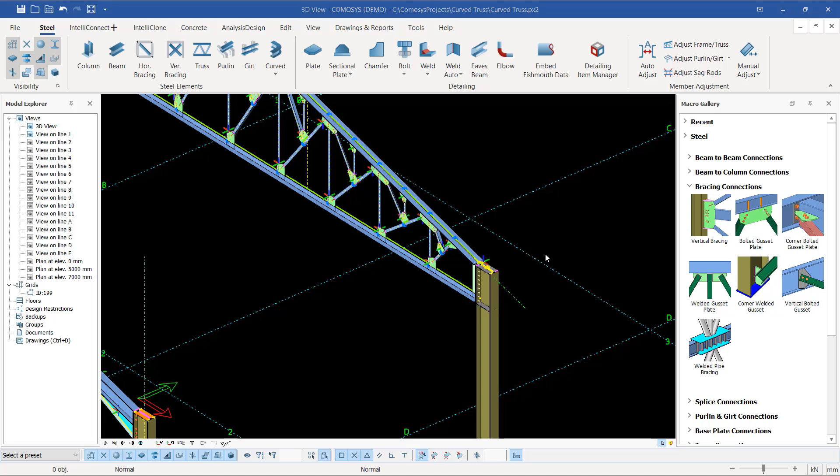We've decided to give it a portal frame. Now we want to create tie beams and vertical bracings here. Now we first of all start with tie beams.

Now under tie beams, I'll come to beams here and zoom close to a point where I'll be able to see a red snap on the screen, and move to the other end also and place and snap on that spot. Right click and terminate that command.

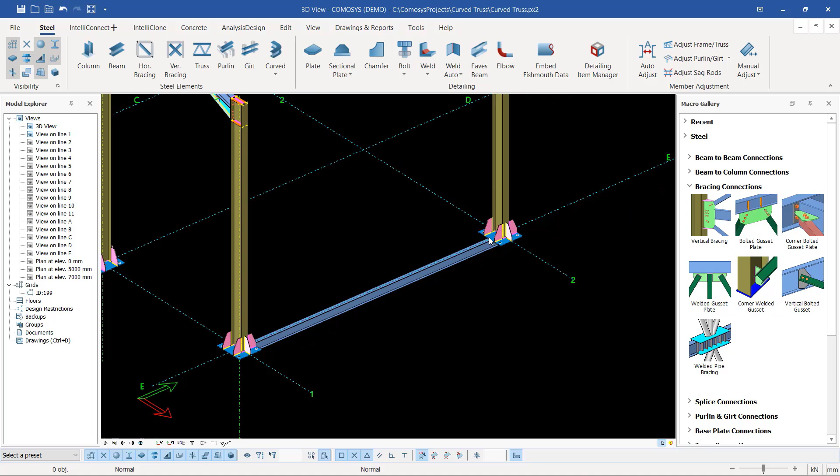Now we want to copy this beam up. Let me double click on that beam so you see the properties. This is IPE 180. If you want to change it, just click on that button and you'll be taken to a huge catalog of all steel profiles. Now let me just click OK to get out of that command.

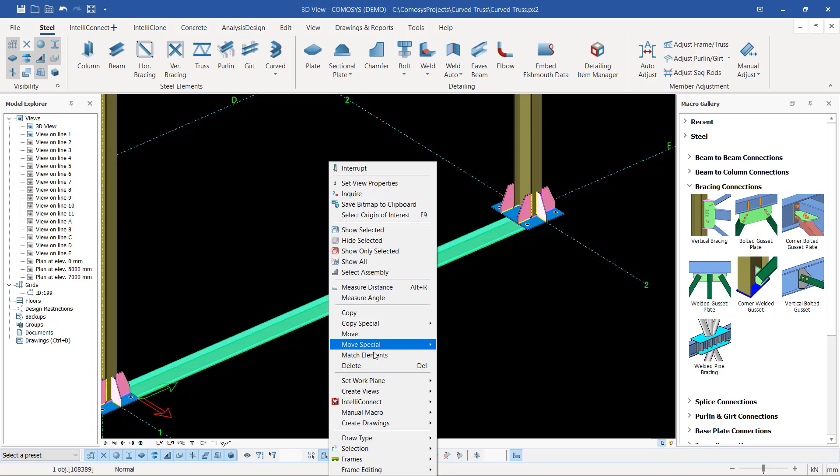I'll right click and come to Move Special here, and feed in 4800 and click move. Once I've clicked move, it will move to this position, or to this far end here. Now here I can create an end plate connection. First, prior to that, let me place the bracings here, place the vertical bracings.

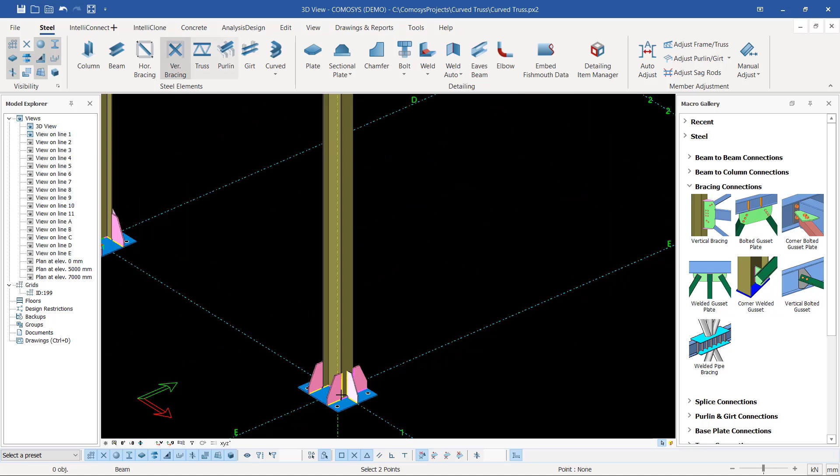Now I'll come to vertical bracings and zoom at the bottom end here until I see the red snap right at the bottom end, and snap right at the midpoint of this particular beam. Let me move up and down until I see an accurate snap right there. So I'll snap once again on the same spot and move to the bottom end of this particular beam column. Right click and terminate that command.

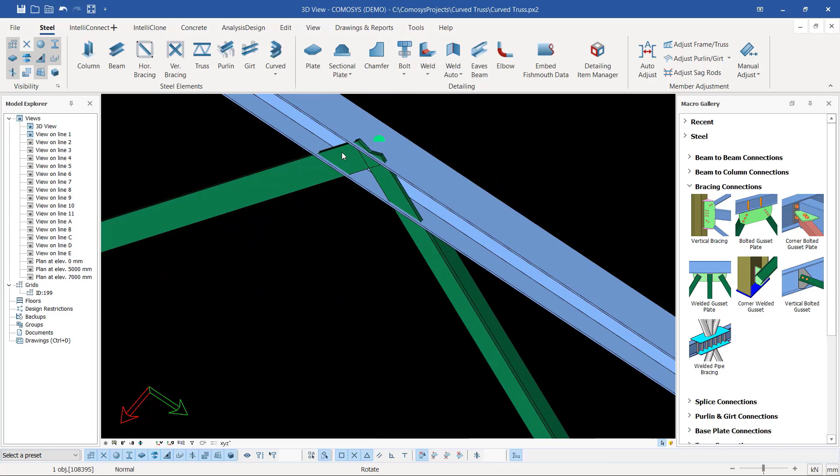If you take a closer look here, you can see we have two L-shaped or angled profiles. So we need a back-to-back profile, or twin angled profile.

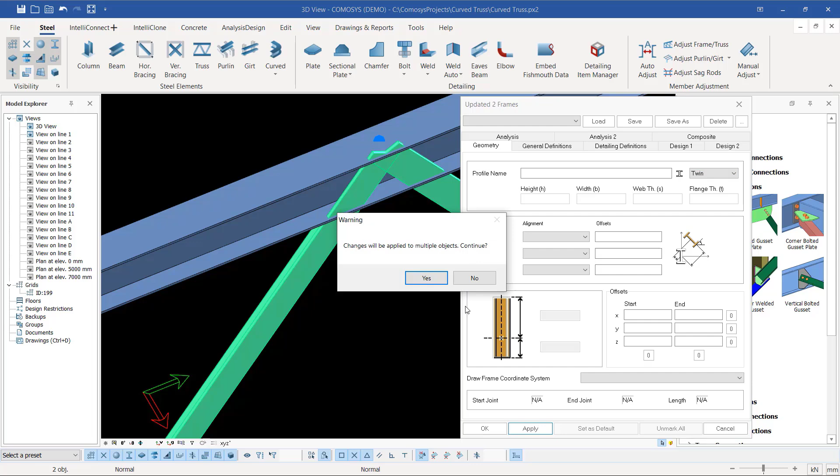So I'll select this member, then press Ctrl and double click on that member. Then I'll come here and select one to include in that selection. Then I'll change that to twin. If I click that, I'll be able to change everything in one go.

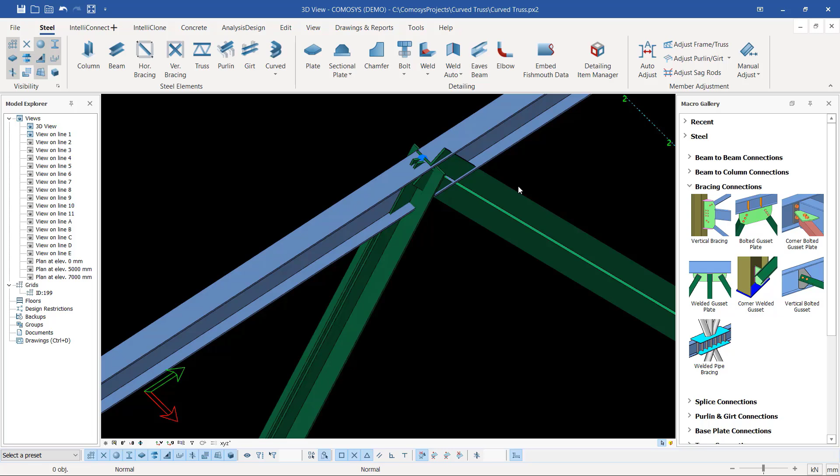So the arrangement or orientation of these members is not the best for me, so I have to change the orientation. I'll select that member, press Ctrl+Q, and turn it like that. Then press Ctrl+Q again, and turn the orientation of these two back-to-back angled profiles. So we have that in place.

So the next thing is we want to create a simple connection at the bottom end here. I'll come to bolted gusset plate — this is the best tool you can apply. Remember, this tool can be applied in so many connections, not strictly to beam and vertical connection. You can also apply it to a column. So let's apply it to the column here.

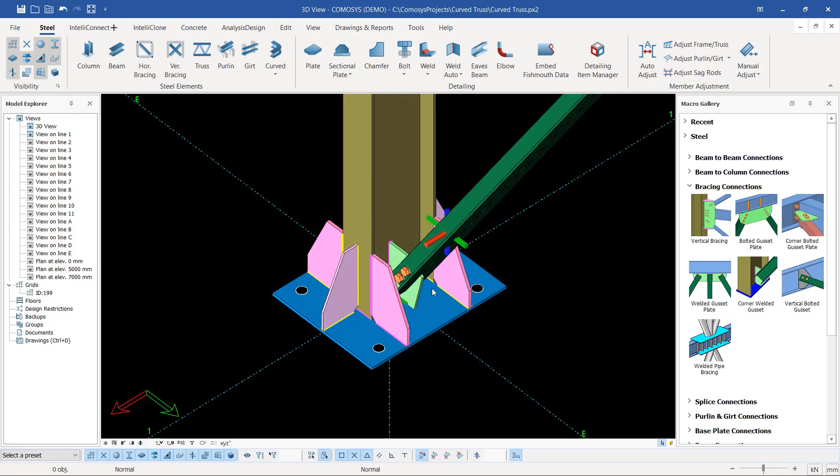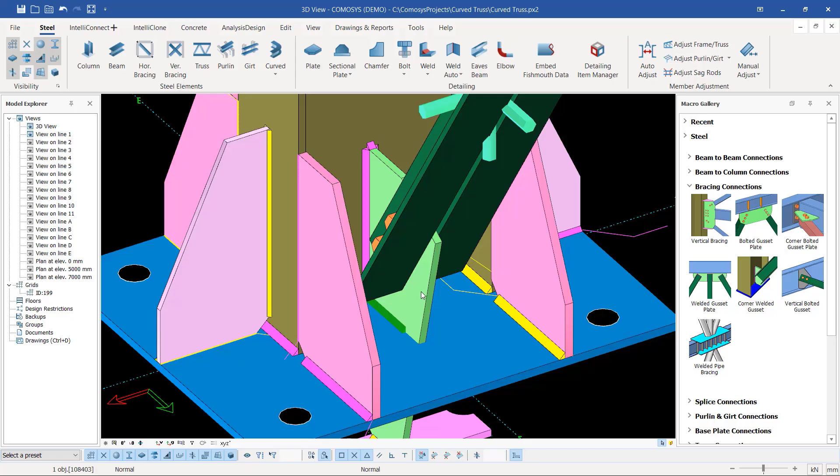Then I'll right click, and you can see a connection has been created, but it slightly needs some modification, because the gusset plate is moving right at the bottom of our base plate. That's not right. I'll select that gusset plate once again and press letter M and enter on my keyboard, and try to modify it so that it fits our requirements. Let me give it some time to bring up the setting dialog box here.

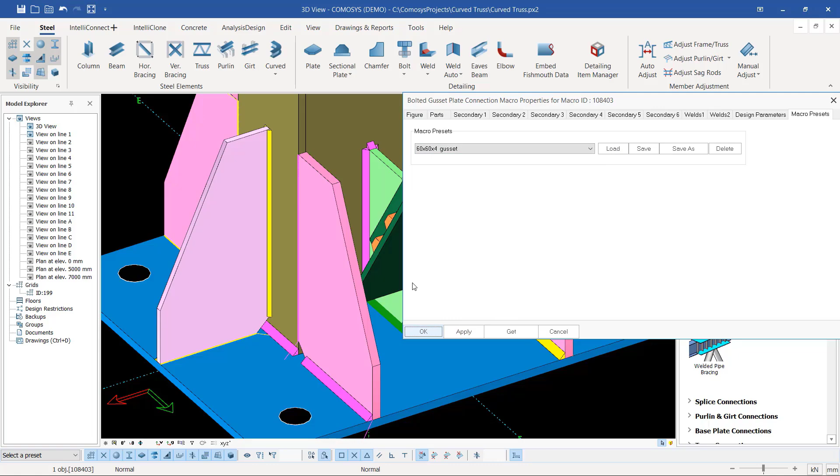Now I'll come to presets here. If I come to presets, I'll pick the brace — this is the type of connection I've customized for how I can apply it between the vertical bracings and column. So I'll select that and click load, then click apply. Once I've done so, you'll see that the clash or collision has gone.

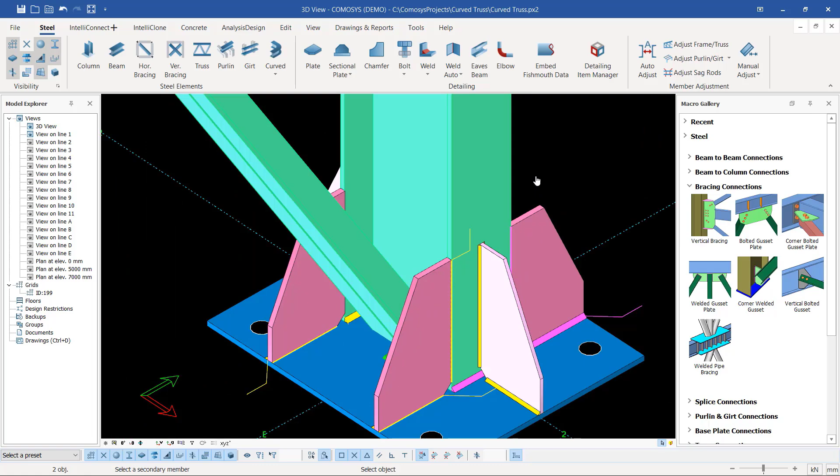So I'll apply the same thing at this far end. Instead of doing the same thing again, let me do it once more so you can see how it works. I'll come back here and select this column and that column, right click to create a connection right there. So if it needs more connection — yes, of course it needs.

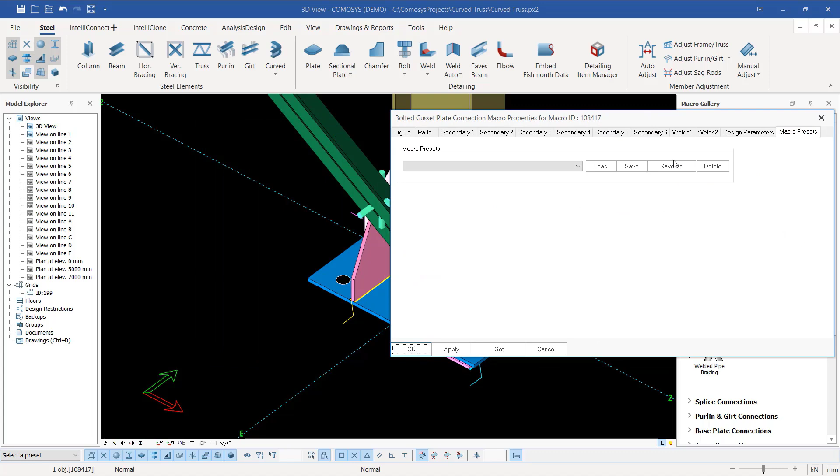Press letter M and enter on your keyboard, and that will bring the setting dialog box for this particular macro. So I'll come to my preset here and pick the right one and load. The moment I load it here and apply, I'll be able to get some modification that fits what I need.

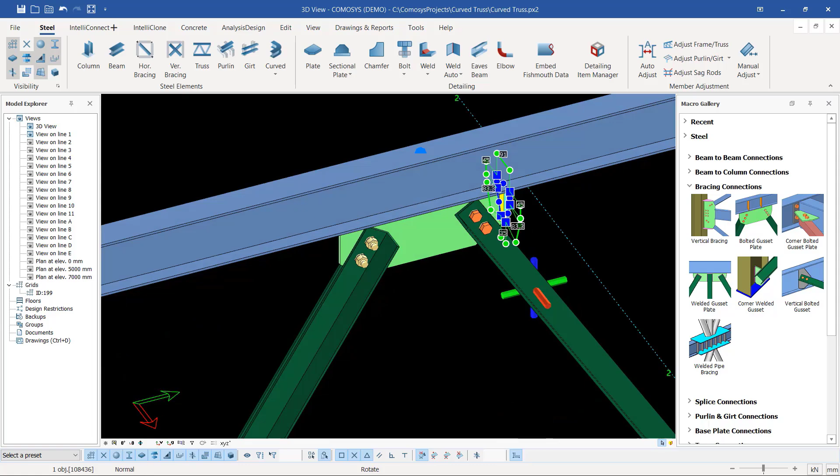So I'll use the same tool, select on that column or beam and select on this and that, then right click to create a connection right there. You can see some plates or gusset plates already on this side, and I don't want that. I select on that, press letter M and enter.

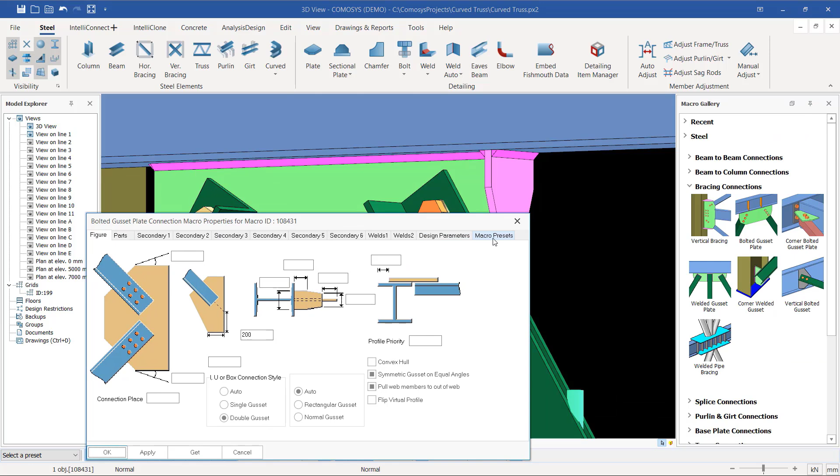Then I'll give it some time to bring the setting dialog box. If it doesn't appear, we just press letter M once again and it will come back. Let me come here and use and apply this. So let me just use brace 1, load that and apply. So I have that in place. That's how I've done that.

Now let's create some end plate connection here. This end plate connection is beam to column. So we'll come to beam to column connection, and I want to create this. Remember to create a connection where the bolt on this side will not interfere with the bolting on the other side. So different end plates will be much better option.

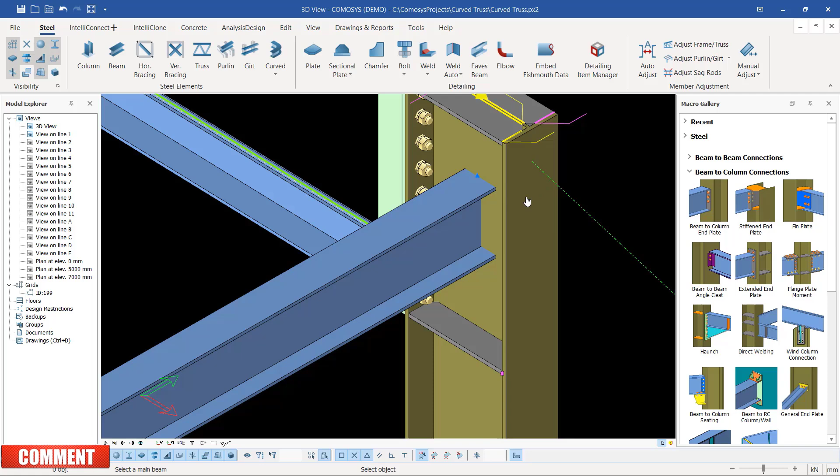If I select on that, select on the column and select on that, then right click, and we've done that. If I click on that and turn that around, I'll be able to see there's no collision, no interference with the bolting on this side that will hinder the erection on site.

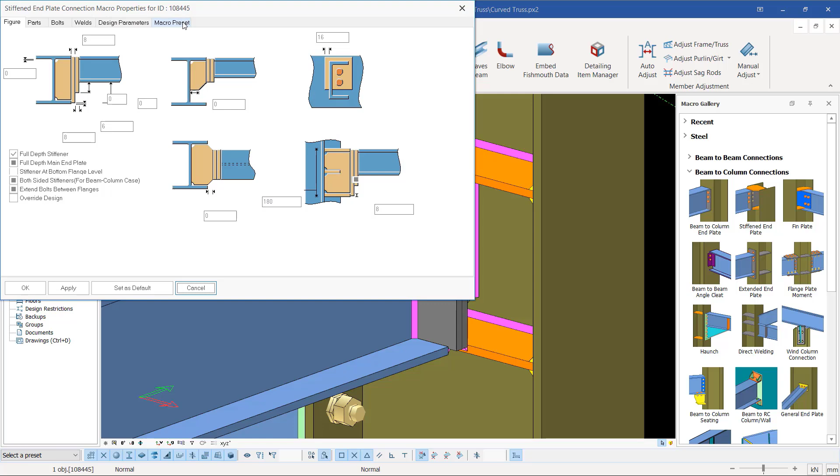Though I need to add some bolts here. So I'll select on this member, then press letter M and enter on my keyboard, then try to add more bolts there. Let me check if I have some presets here. I don't have some presets there. I'll come to figure here. Under figure here, I want to add some bolts.

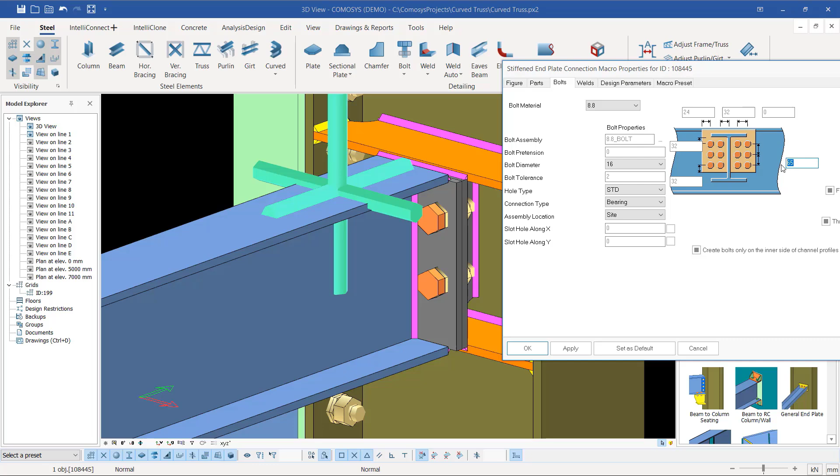So to add bolts here, I'll come there and try to modify this. How many do we need? We need probably quite a number. So if I come here, this is 32 and I need maybe 3. Let me try add that. Let me just give it 65 and enter that... 75. That's enough, we don't need to add more bolts. This is just for demonstration on how to apply this.

So if I come here and select on this member here and press letter M and enter on my keyboard, I want to save this type of connection.

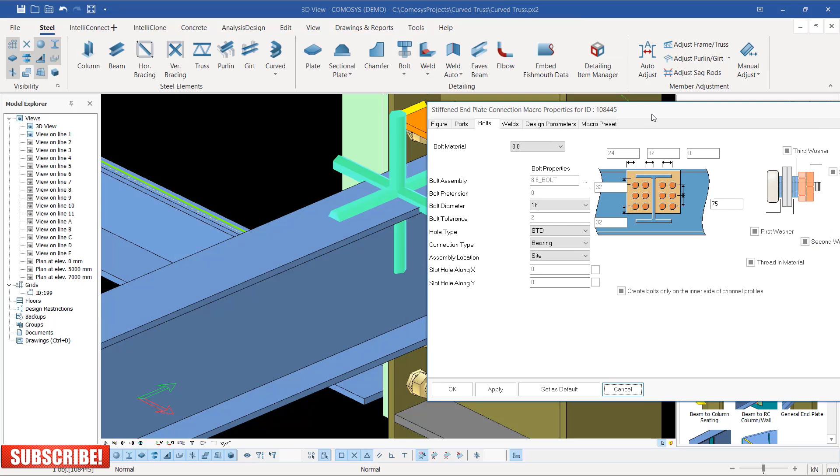So I'll come to preset here and click save as, and I want to type beam, just beam column connection. Column connection. That's it. Beam column connection 1.

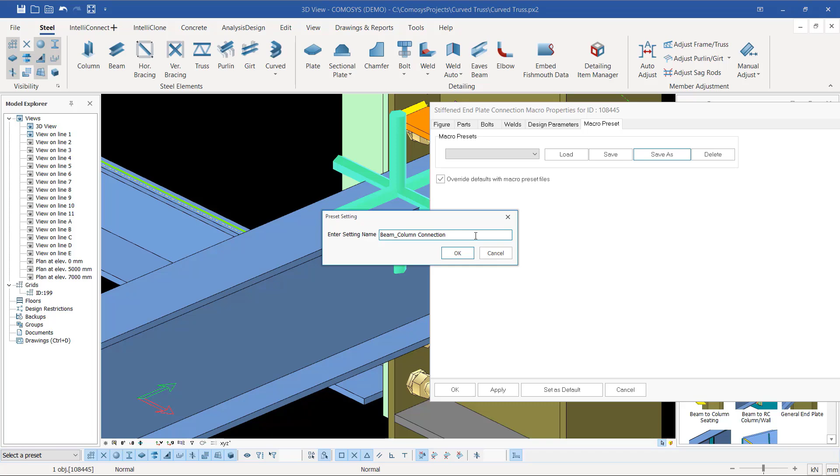So I click OK, and if we can edit it further, we can even change that to 80. Let me just type letter M and enter. So if I come here, I can change this to 80 also, then apply and give it an OK. Remember, we can always save these settings.

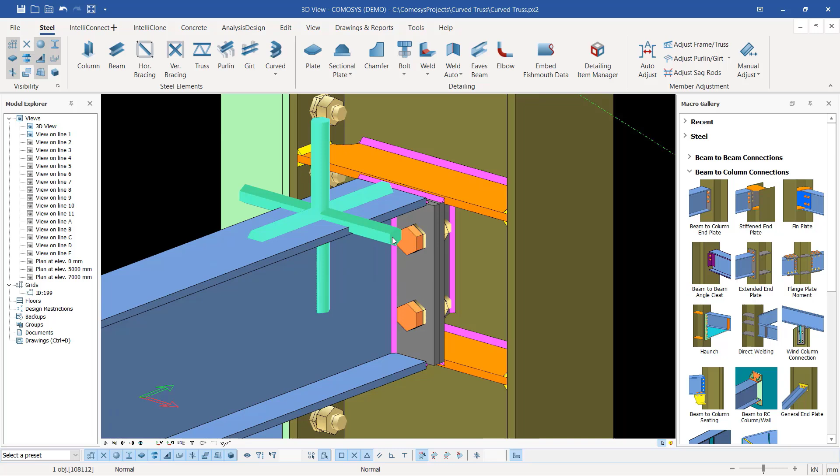If I go back and do the same thing, just type letter M and enter, because our macro is still active. This is a symbol of the macro. So you can always hide it by clicking on that button here.

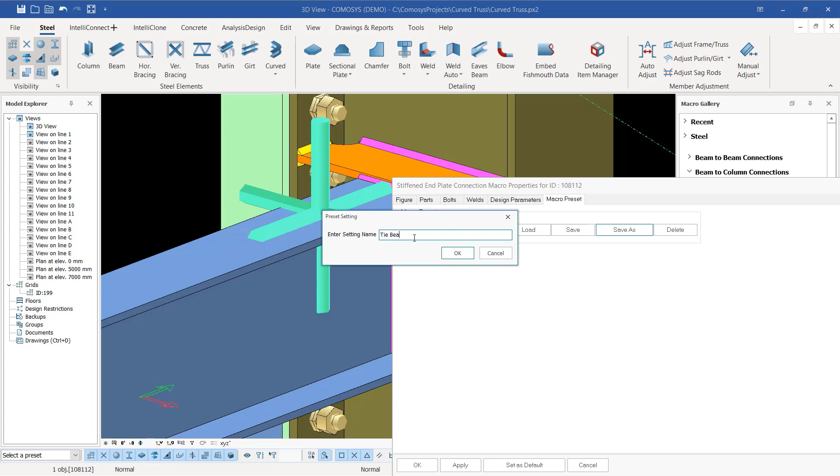So we want to save this preset. If I come to save as here, then I type tie beam, and click OK. I've saved that.

So once I've saved that, and if I come here and click OK, then I want to apply the same on the opposite direction. It's always important that apart from cloning, we can also just apply the connection directly, because sometimes the system might take time to process, or sometimes it might crash, and the program might fail to process that information. It all depends on the power and performance of your computer.

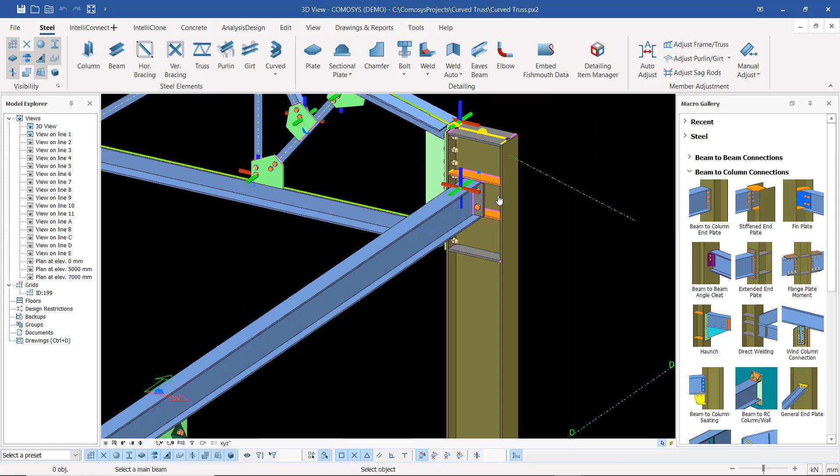Now let me just come back here and select on that. Then I want to create a connection here and here. Then right click to create a connection. Let me just select my point of interest and turn that round. So you can see I have that in place.

And probably there's some part that I see there's a lot at the bottom end here, you can see it's overcrowded, and no problem. Let me just select on that, tap letter M and enter on your keyboard, and we can apply this tie beam connection and click apply and give it an OK.

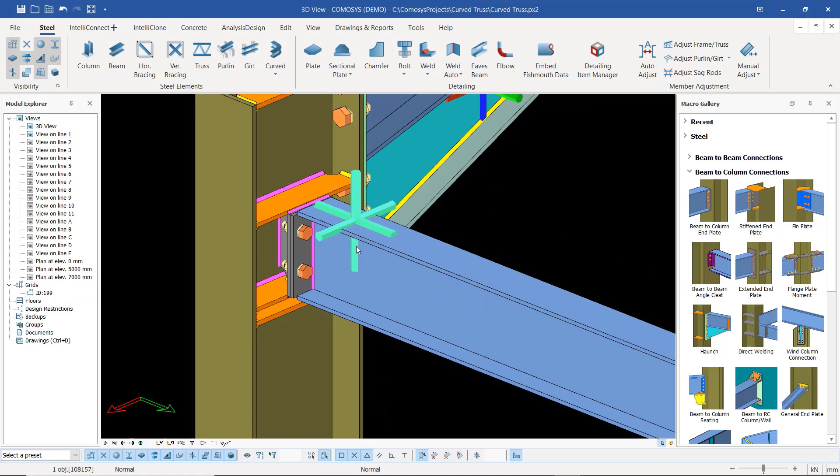We can go further and get rid of that. Once we are done, this is just a demonstration on how we can use COMOSYS to do wonders in detailing.

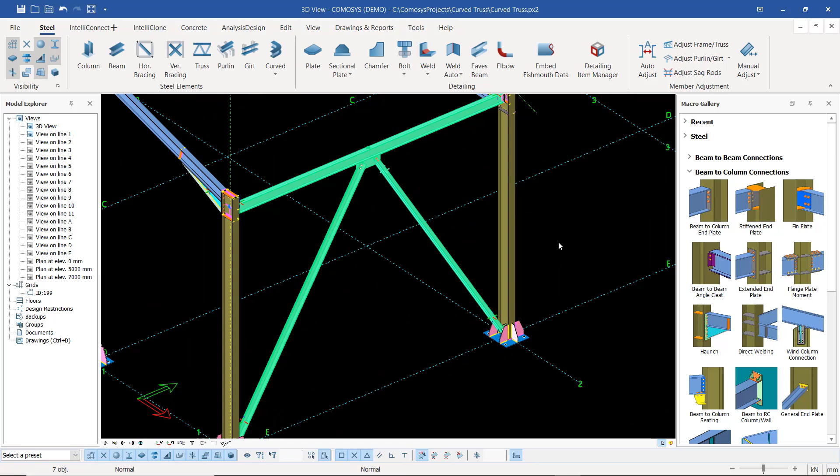Let me select these members, then right click and come to special copy, and select linear. I want to zoom at the bottom end here until I see that red snap, and move the other end here. I'll mouse over until I see that red snap symbol. I want to copy this tie beam and the bracing on the other end.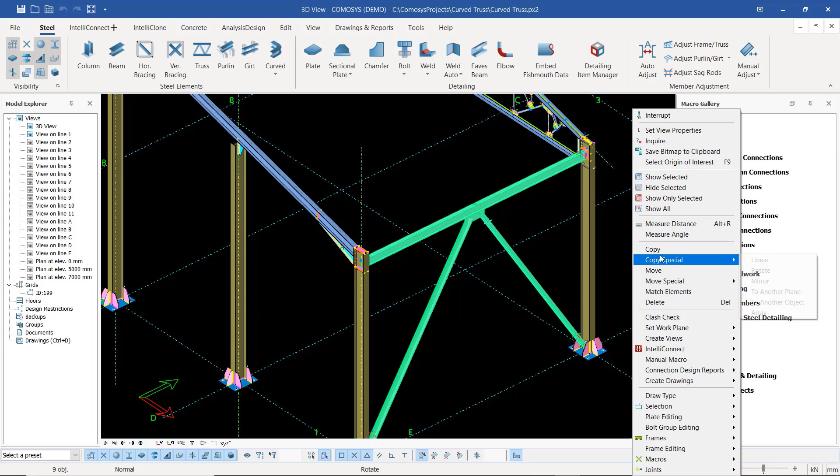So I can select everything here, then right click and come to copy special and apply that. I'll zoom at the bottom end here and snap on that spot, and snap here. Let me just snap there, and we can see that. If I go ahead and click copy, give it some time, and everything has been copied.

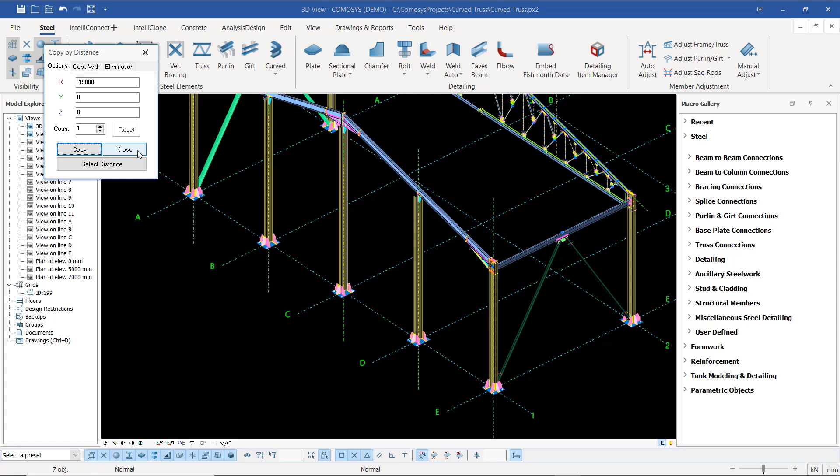So we can apply the same on that direction. Let's zoom closer, because you can see even the connections have been copied. If I select on this, then come here and select on that, and try to populate this along the y-axis. Let's try that. First of all, don't forget to save your work.

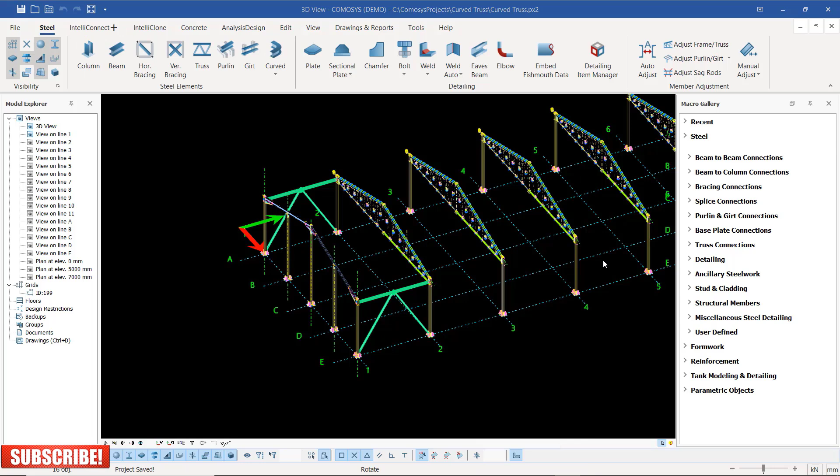Once you've saved that, I'll right click and come to copy special and pick on linear. Under linear, I'll be able to snap at the bottom end here, and snap from here. Make sure you mouse over until you see that red symbol of snapping.

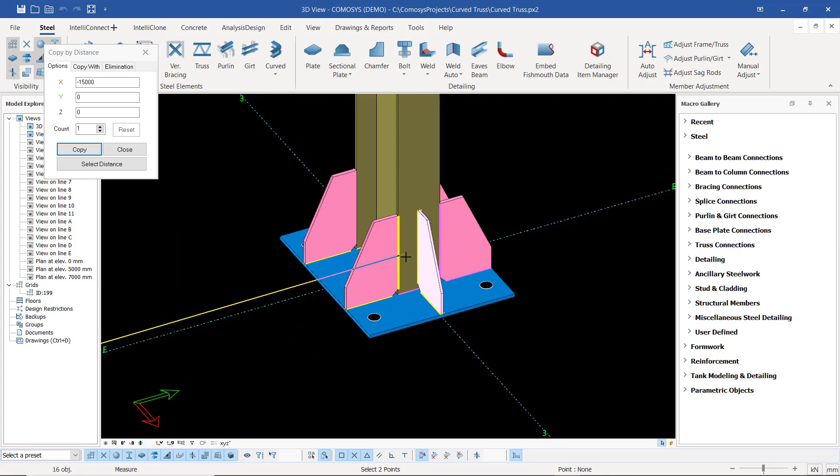So then I'll do the same thing here, mousing over until I see that red snap. It is 6 meters along the y-axis, and we need how many? There are how many bays? There are 10. We have 1, 2, 3, 4, 5, 6, 7, 8, 9. We need 9 of them, so I'll increase that to 9.

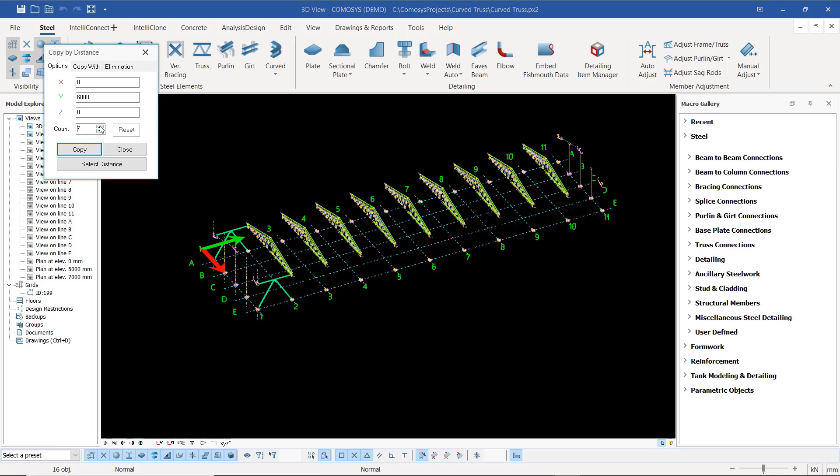So if I come here and click copy, let me come back again and select everything here and select that. I want to populate this along the y-axis. If I right click and come to copy special, or I just copy one by one, let me just try a linear copy.

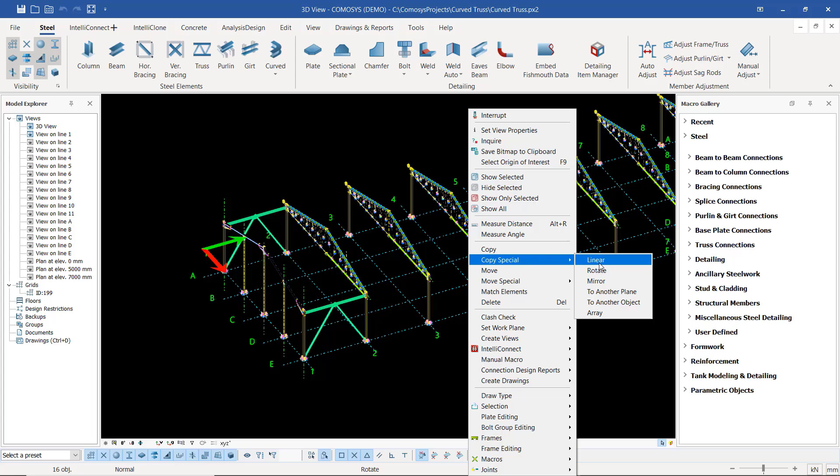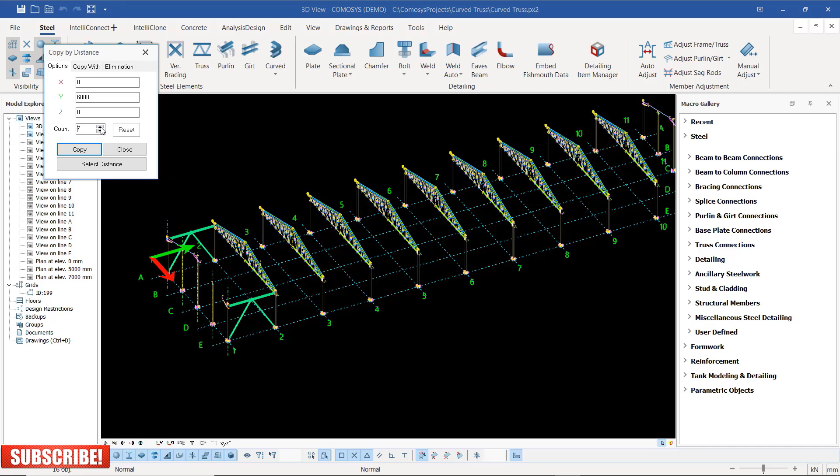Then I mouse over this till I see a red snap right there. Let me zoom on that spot and place another one here, then zoom close and snap another one there. So how many do we need? We need 9 of them, so I'll increase this to 9.

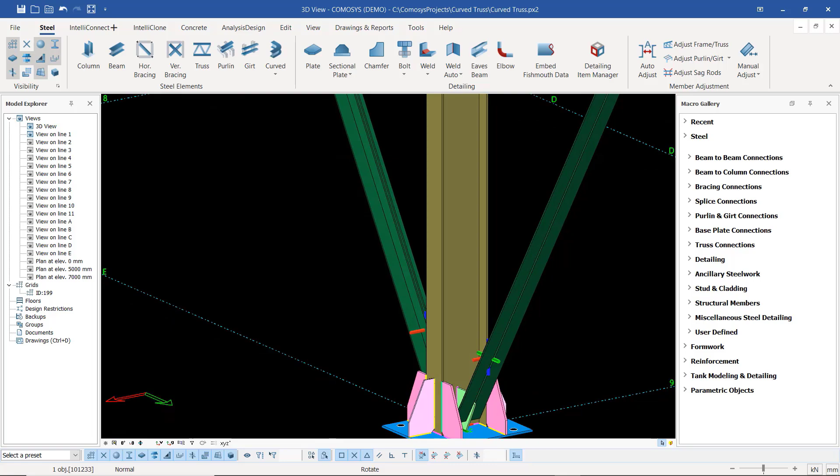Once I've taken it to 9, I'll go ahead and click copy. Give it some time to process everything, and everything has been copied. If you zoom closer, you'll be able to see we have everything in place, plus all the gusset plates in place. So if we turn that around, you can see.

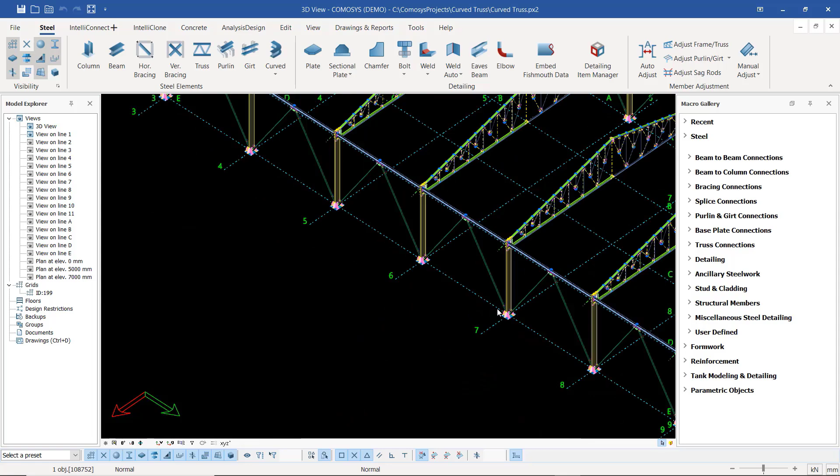Always remember to save your work, because sometimes the system shuts off, and that will be very unfortunate, leaving you hanging with all the details somehow gone because you've not saved anything. So this is how far we've gone, and that's how we can apply the tie beams and create connection at the column base here, to the tie beam, using braces.

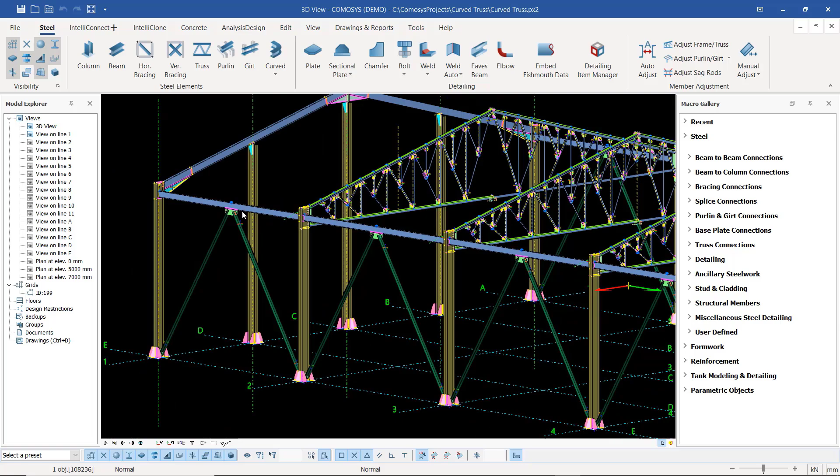Let me turn that around, and you can see the type of connection we've just created. There's slightly, we've not created connection here. A connection has not been created there, but that should not be a worry. We'll be able to create them as you go. So that's how you can do that.

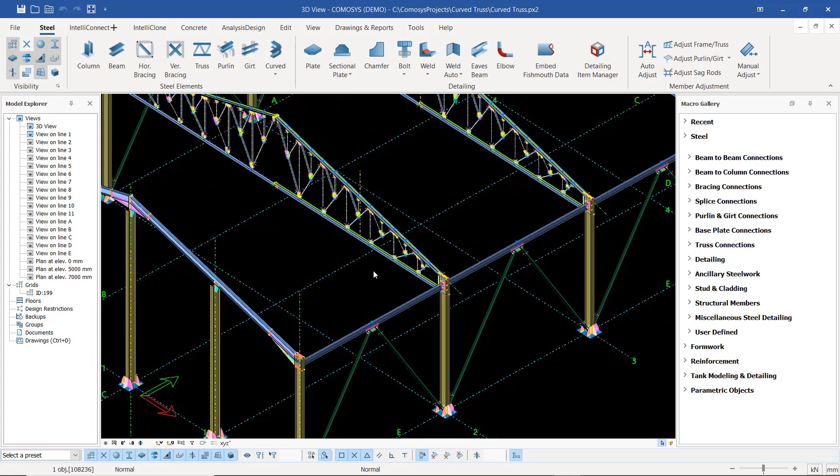So let's meet then on the next presentation. On the next presentation, we'll be placing the purlins, the roof purlins, and also the gable cladding rails, and all the cladding rails.